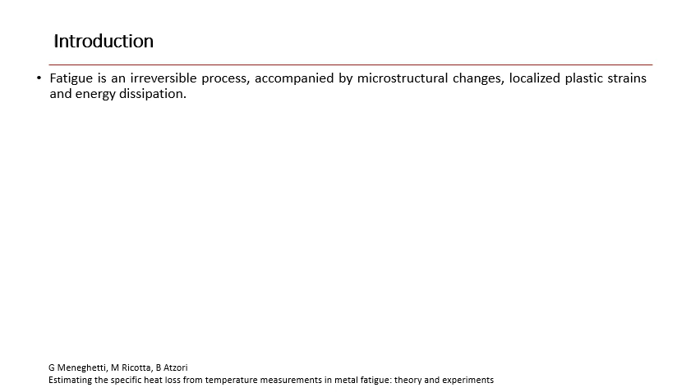Fatigue is an irreversible process accompanied by microstructural changes, localized plastic strains, and energy dissipation. The temperature increment of a metallic material undergoing a fatigue test is a manifestation of the thermal energy dissipation. In particular, during a fully reversed elastoplastic fatigue cycle, material temperature oscillates due to the superposition of two different phenomena.

The thermoelastic effect, that is a reversible phenomenon, combined with temperature change related to the plastic energy dissipated as heat twice in one cycle, here named as delta Tp.

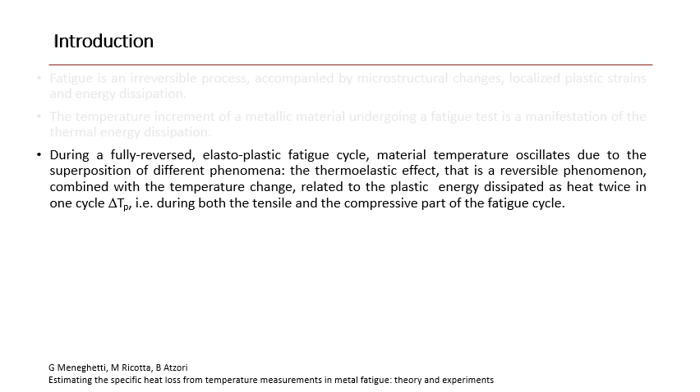Bar and co-authors recently showed that concerning fully reversed tension compression fatigue tests, delta Tp is spread out into several harmonics of the discrete Fourier transform of the temperature signal, starting from that modulated at double the frequency of the applied load, which however retains the most significant contribution.

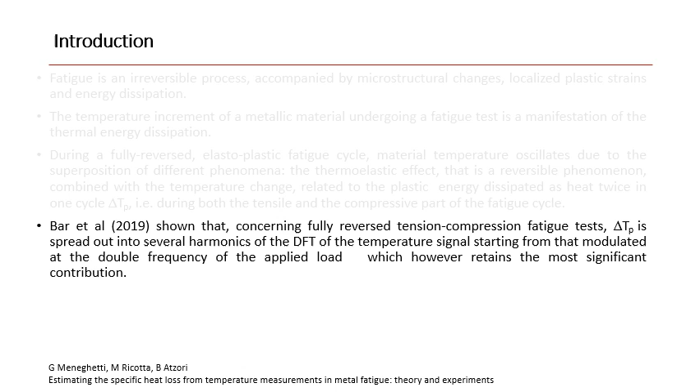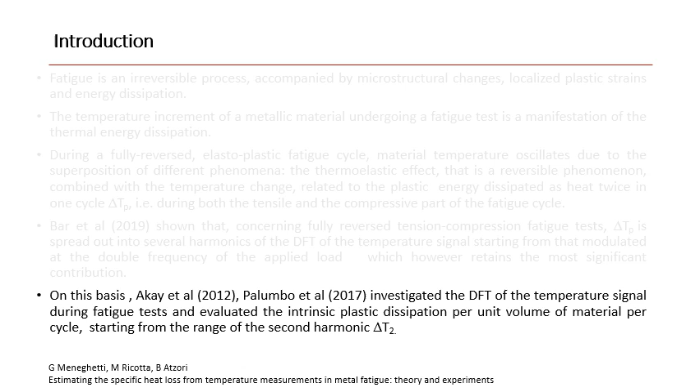And then, some authors, such as Akay, Palumbo and co-authors, investigated the discrete Fourier transform of the temperature signal during a fatigue test and evaluated the intrinsic plastic dissipation per unit volume of material per cycle, starting from the range of the second harmonic, here named as delta T2.

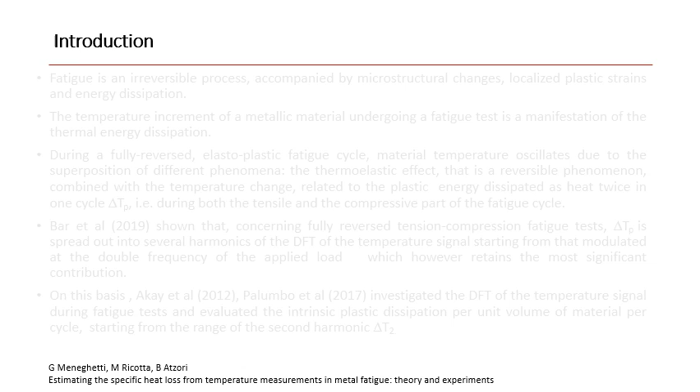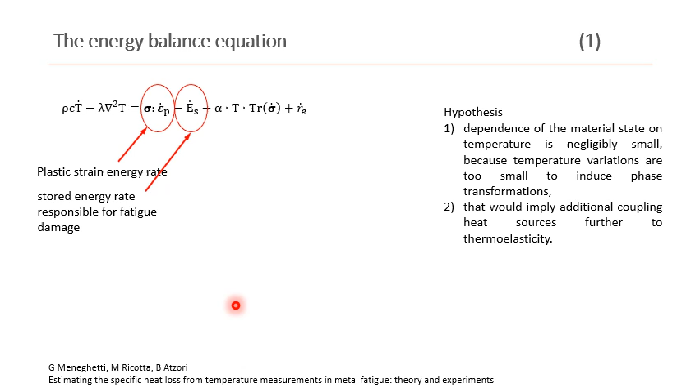Under the hypothesis that dependence of the material state on temperature is small, because temperature variations are too small to induce phase transformations, the energy balance equation can be written in terms of power, as you can see here, where this term represents the plastic strain energy rate, this one the stored energy rate responsible for fatigue damage, this one represents the heat rate per unit volume due to thermoelasticity, and the last one represents the heat generation rate per unit volume supplied to or extracted from the material by external sources.

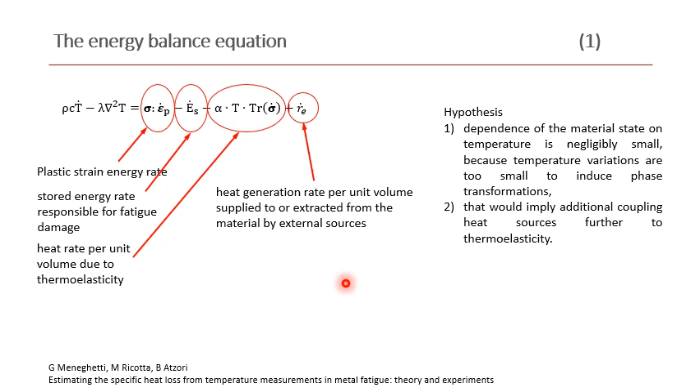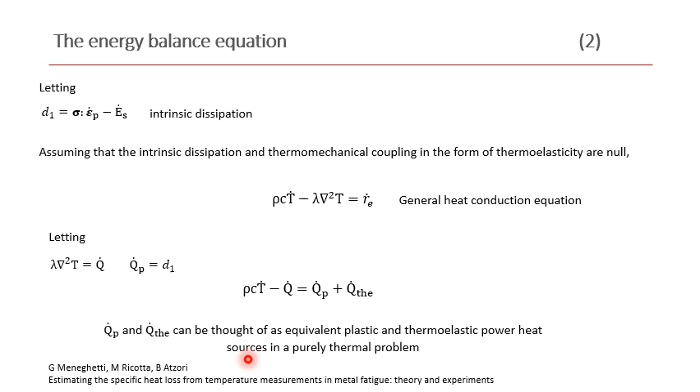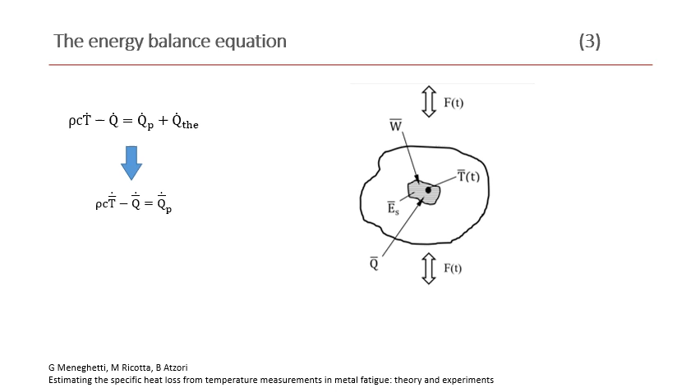If the power quantities appearing in the previous equation are added over one loading cycle, the equation simplifies in this form, because the contribution of the thermoelasticity vanishes, because it consists of a reversible exchange between mechanical and thermal energy, which does not produce a net energy dissipation or absorption over one loading cycle.

When during a fatigue test the temperature stabilizes because equilibrium is achieved between the heat production in the specimen and the heat transfer to the surroundings, T dot becomes null, and then the equation simplifies in this form.

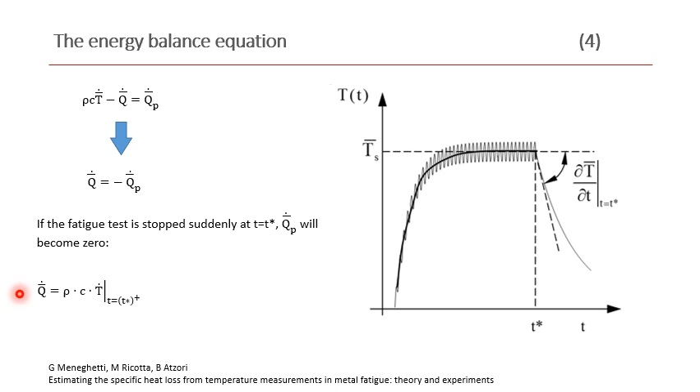If the fatigue test is suddenly stopped at T equal to T star, Q dot P will become 0, and then Q dot can be measured by experimentally measuring the temperature gradient at T equal to T star, and then, divided by the load test frequency, we can experimentally evaluate the heat energy dissipated by the material per unit volume of material and per cycle, according to this equation proposed by Meneghetti 2007.

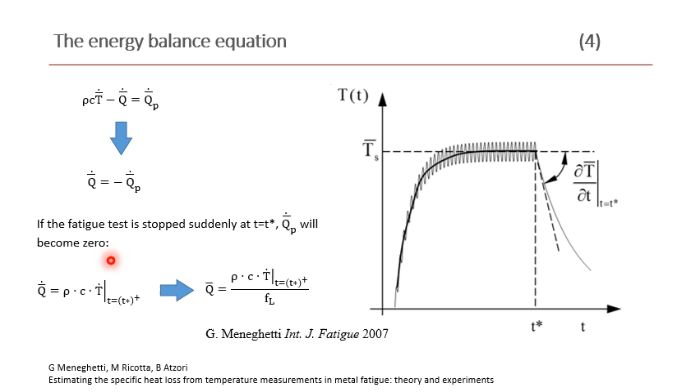Under the hypothesis that, first, the plastic strain energy rate is fully converted into specific heat energy rate, and second, that a uniform stress state and adiabatic condition exist, the first principle of thermodynamics can be written according to this equation, where Tp is material temperature due to plasticity and T thermoelastic is the material temperature related to thermoelasticity. And then, by the integration of this equation, we can evaluate the material temperature evolution over one loading cycle.

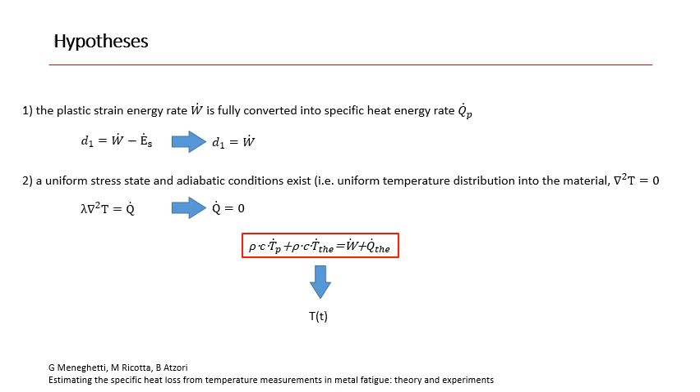The plastic component of the strain along the loading branch of the hysteresis cycle can be written according to this equation, and finally the plastic strain evolution along the unloading branch of the hysteresis cycle can be written according to this equation. From the plastic strain evolution, the plastic strain energy rate in one loading cycle has been calculated, and its trend is shown in this picture. Finally, by the integration of the plastic strain energy rate, the temperature variation due to plasticity has been calculated, and the result is shown in this equation.

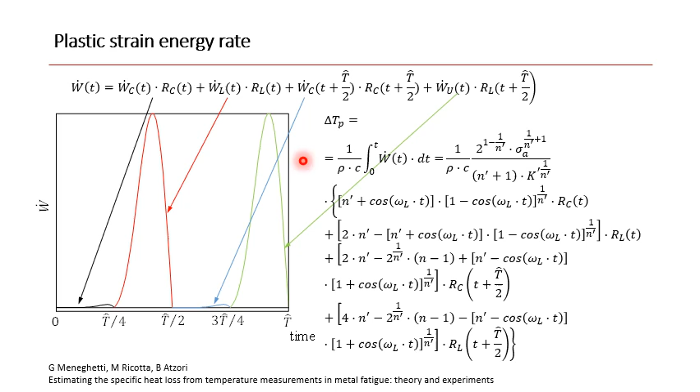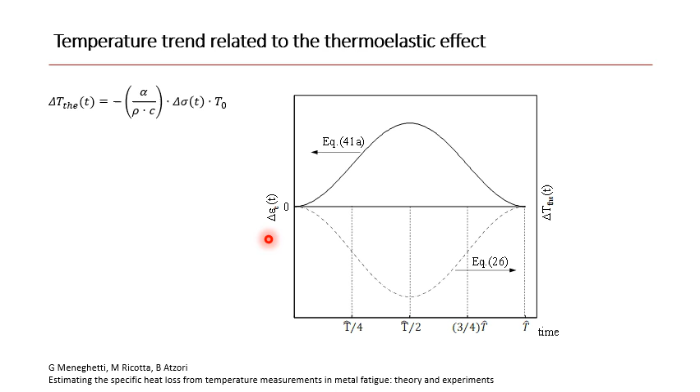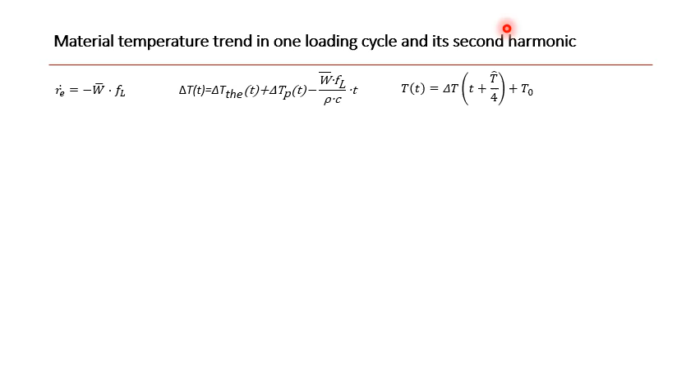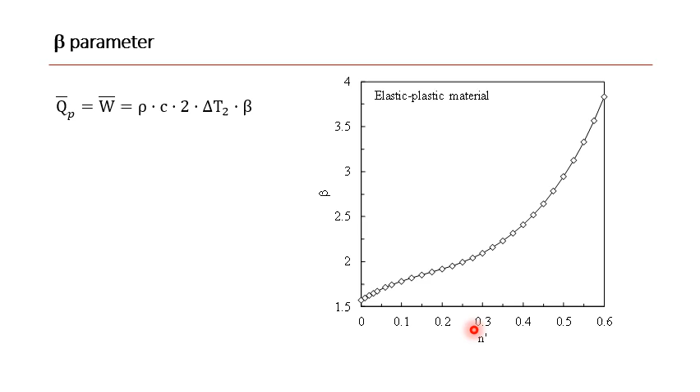The proposed analytical frame was applied to experimental tests that we have carried out recently for the rapid evaluation of the fatigue limit of AISI 304 low carbon stainless steel bar. In that paper, we have carried out step load fatigue tests by imposing incremental stress amplitude ranging from 270 up

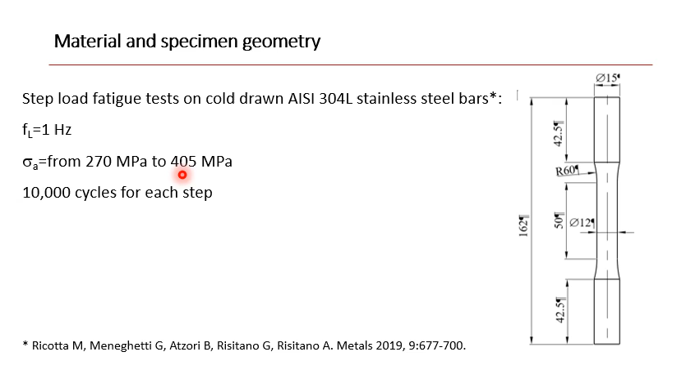to 405 megapascal. Two consecutive temperature acquisitions were performed using, in both cases, a 10-second long sampling window with an acquisition frequency of 200 Hz. In particular, the first acquisition consisted of exactly 10 seconds of running tests, followed by the second one capturing the machine stopped at time t equal to t star to measure the cooling gradient and then to evaluate the Q parameter by using the classical approach proposed by Professor Meneghetti in 2007.

On the contrary, from the first acquisition, the range of the second harmonic of the temperature signal delta T2 was evaluated by post-processing the mean temperature evaluated in a small area placed in the center of the net section of the specimen by using MATLAB software. And then, having the delta T2, we have evaluated the Q parameter by using the analytical approach proposed in this paper.

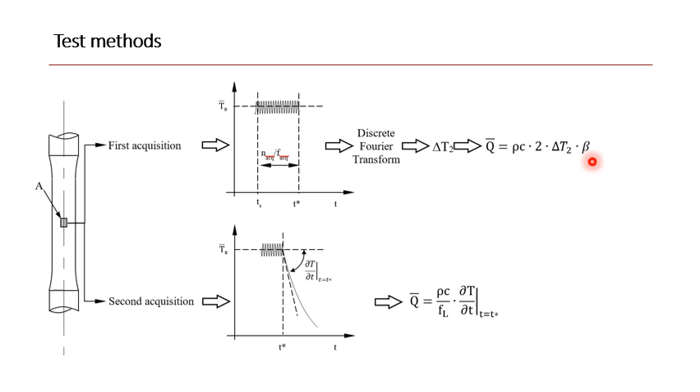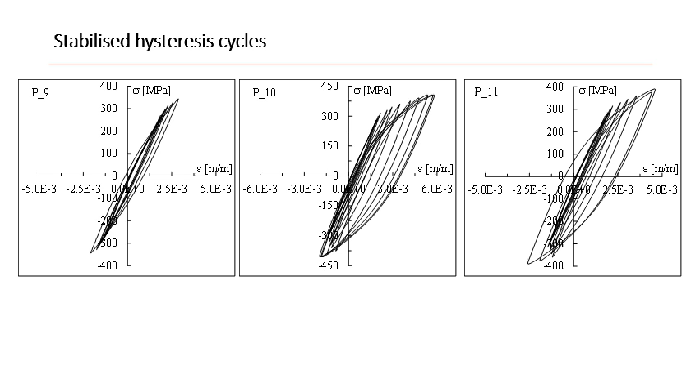During the fatigue tests, the hysteresis cycles were measured and the stabilized hysteresis cycles measured at each applied stress level are shown in this slide. Having the area of the hysteresis loops, the W versus applied stress amplitude trends were fitted by using this well-known equation, which assumes Masing material behavior. The fitting procedure was carried out considering only the data clearly below and above the knee points, as suggested in our previous paper.

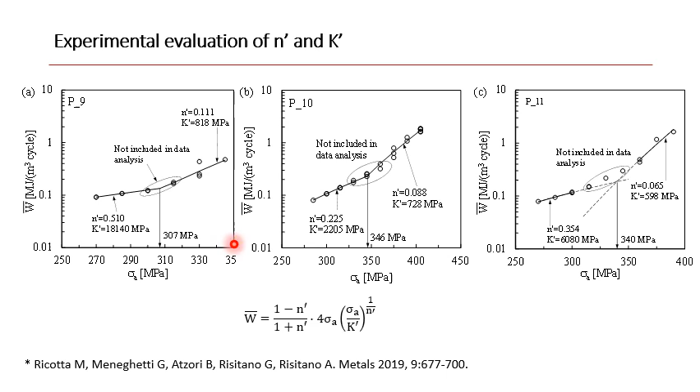It can be seen that different values of n and K were found for a single specimen because of the cyclic evolution of the tested material. During the step load fatigue tests, the material temperature was monitored by using an infrared camera to evaluate the Q parameter according to equation 1 proposed by Meneghetti 2007 and according to equation 5 that is proposed in this paper.

In the figure, you can see the second harmonic of the temperature signal as well as the succeeding cooling gradient. It can be seen that the range of the second harmonic is of the order of hundredths of a Celsius degree, while the temperature drop measured during the cooling gradient is 1 order of magnitude higher. Therefore, noise influences the signal-to-noise ratio differently, being significantly more critical on the delta T2 evaluation.

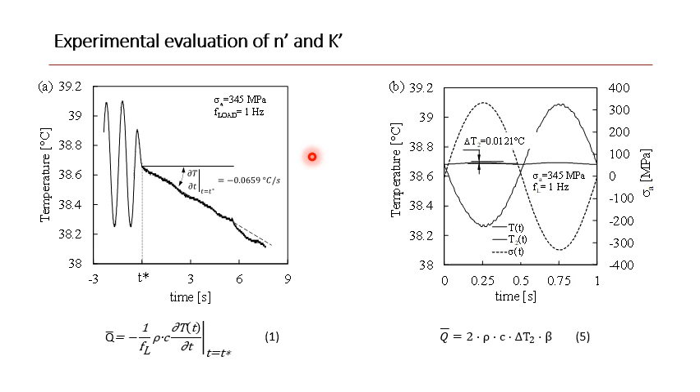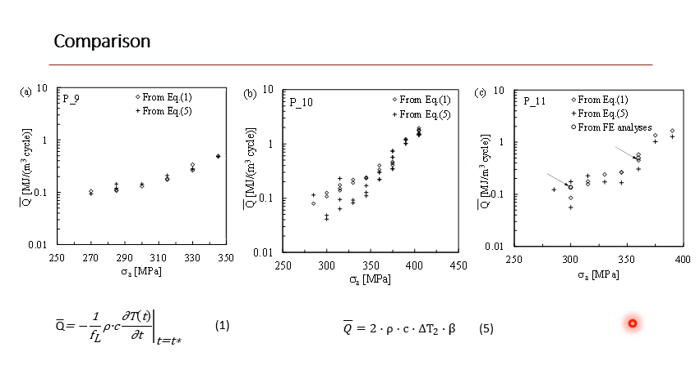This slide shows the Q parameter evaluated according to equation 1 and according to equation 5 for each tested specimen. It can be seen that the data relevant to Q evaluated according to equation 5 are closer and closer to that calculated according to equation 1 at progressively higher applied stress amplitude, since the range of the second harmonic to noise ratio becomes higher and higher. In the authors' opinion, this is related to the fact that the range of the second harmonic is of the order of hundredths of a degree and then comparable to the noise affecting temperature measurements.

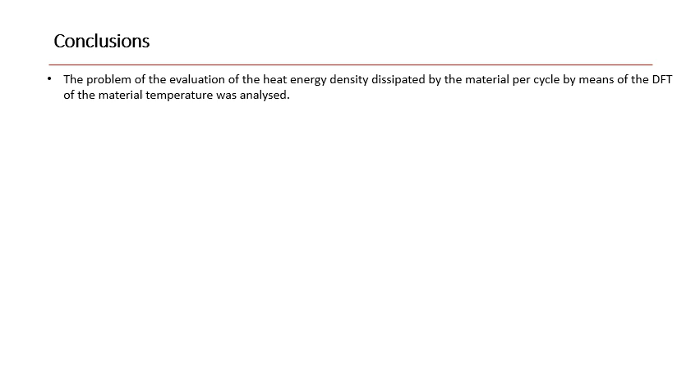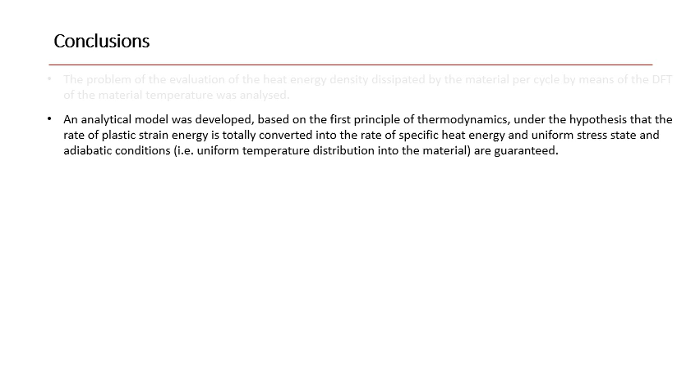The problem of the evaluation of heat energy density dissipated by the material per cycle, the Q parameter, by means of the discrete Fourier transform of the material temperature was analyzed. An analytical model was developed based on the first principle of thermodynamics under the hypothesis that the rate of plastic strain energy is totally converted into the rate of specific heat energy, and uniform stress state and adiabatic conditions are guaranteed. The analytical model was applied to the case of an elastic plastic material.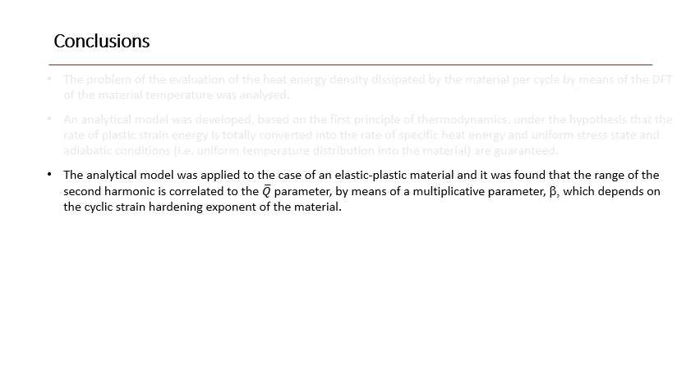It was found that the range of the second harmonic is correlated to the Q parameter by means of a multiplicative parameter beta, which depends on the cyclic strain hardening exponent of the material. The Q values calculated according to the analytical model have been compared to those measured during the same tests by using the well-established experimental procedure proposed in the past by Meneghetti.

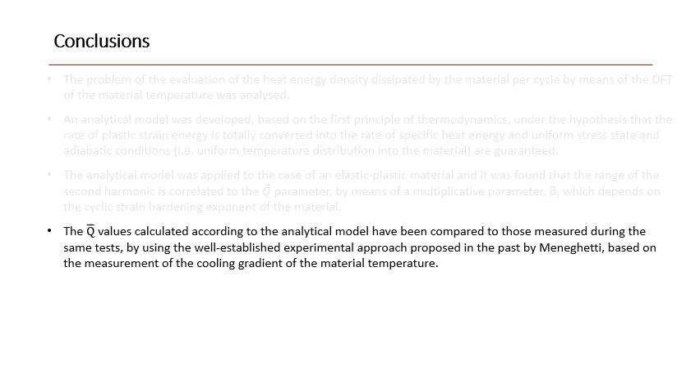It was found that the results obtained by following the two approaches are closer and closer for progressively higher applied stress amplitude. In the authors' opinion, this is related to the fact that the range of the second harmonic is of the order of hundredths of a degree and then comparable to the noise affecting temperature measurements, at least considering the material and the test condition analyzed in the present paper.